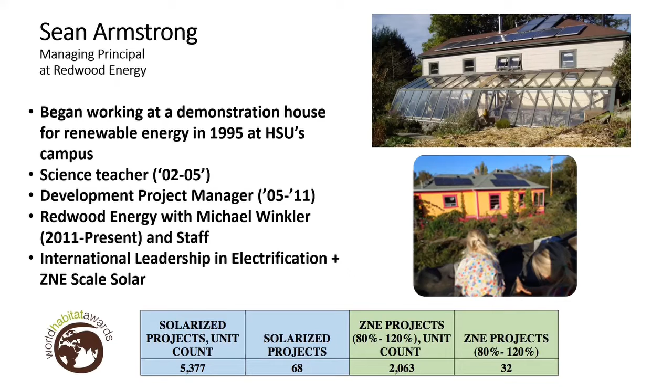Okay, so I want to give you guys a metaphor. The last time we really transitioned energy use was with horses. We went from 4 million to 24 million horses in 60 years in the United States. Our streets were literally filled with feces. You could not really cross streets in New York City without someone to shovel the way for you. It was like snow that never left. And it was 200,000 horses in New York City.

The founding of the ASPCA, the American Society for the Prevention of Cruelty to Animals, was a New York City effort to get people to stop beating their horses and to start putting them in at night in the wintertime. I'm thinking of how cold it got just last week in New York City. People didn't used to put the horses in. Horses live naturally for 30 years, and they die at an average of 3 years in New York City.

They would take 2 acres and 30 tons of hay a year. They would poop 30 to 40 pounds a day on the street and piss a gallon each horse. I used to have a horse-drawn carriage business. I did that for a summer, my freshman year in college. I just got this crazy job from this crazy guy. And I did it all summer long, Friday, Saturday, and then Sunday weddings.

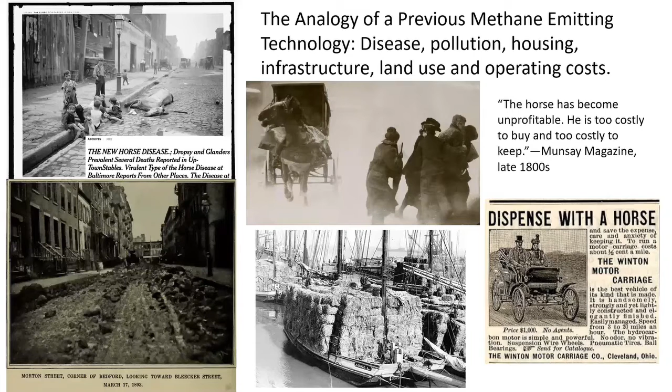One thing to note, though, is that cars are much more dangerous than horses in terms of the number of kids killed. There's a real transition in our road culture from kids being in streets to cars killing kids so frequently that streets are not a place for people now. Car companies really badly wanted that transition to allow them to go 40 miles an hour down a road that used to have 7 miles an hour horses. So, kid deaths.

Now, this trend of electrification is not policy-driven, it is cheap-driven. The leaders of electrification in our country are the least environmental part of it politically, the South. They are electrifying about 60% of their new construction. Nationally, a little under 1 in 4 homes built in the country right now are all electric. In California, it's like 10%. We are one of the least successful states in the whole United States at electrification because we have cheap fossil fuels. We're an oil-producing state. We frack, we drill, 90% of our buildings are gas.

And I encourage us all to look at that carefully, because fighting with people with money is like spitting into the wind. And it really would be much better to figure out how to lower the costs for people and just keep on moving without arguing over things.

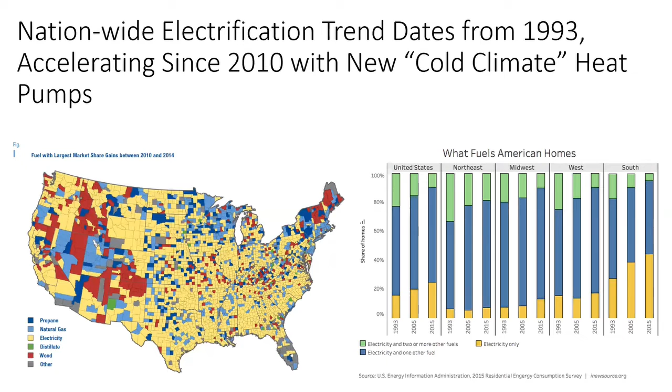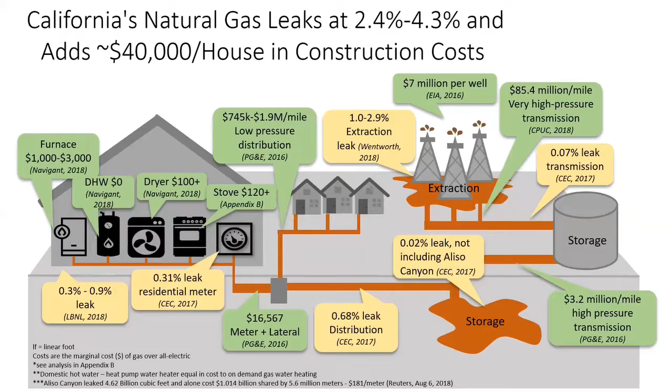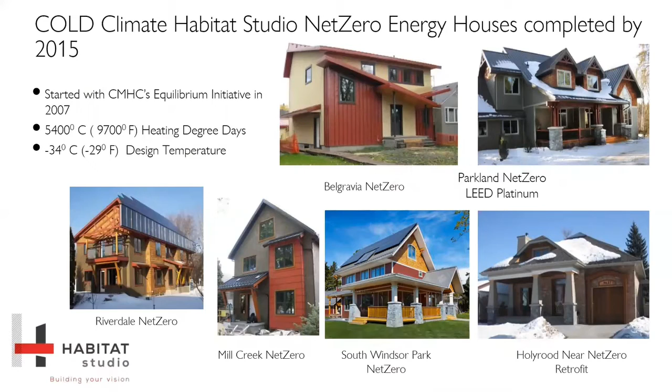Now where we're going though is production homes. Today, 1 in 5 new California homes have a solar array. It's not small. The average solar array on a new house is 8 kilowatts, which is massive. It's a big PV array. That's enough to power the house and maybe a car. So we are seeing, because it sells, 1 in 5 homes this year being solarized. These are production homes, it's all about selling it.

And next year, we're gonna have all homes. I don't know if you caught that, but the code that starts on January 1st, all homes in California have to put in a PV array. All apartments three stories and less, all of it. And it's about 60% offset, it's not 100%, because we still have gas in it, but we're pretty close there. So it'll be 85,000 residences next year built in California, all with a solar array, starting January 1st, to get a permit. So I want to show you, what does that look like?

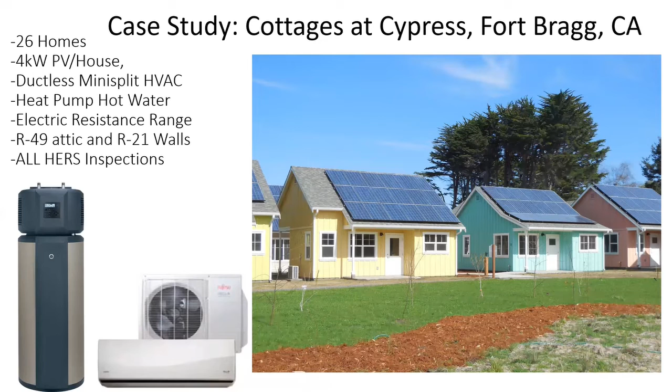These are larger homes, but they have the exact same 4 kilowatt system. So a little bit more efficient. These are built just like 2 years later, and already the systems have become more efficient. The houses were twice as big, and the systems were more efficient, so that there's 0 increase in the PV array. Awesome.

So this is now a ducted system. This is a larger compressor outside. This is an air conditioner compressor that works in reverse. Heat pumps are air conditioners that just work in reverse. So they work as an air conditioner like normal during the day or during the summer. And then they have a reversible pump instead of a single direction pump. They've got one more valve that controls the compression cycle the other direction, and you're done.

So you take an air conditioner, you spend $200 on it, and it becomes a heat pump. A very cheap way of getting a heater. Okay, so in consumption of energy, in these homes, plug loads are the #1 use. That's just something to note. At this point, it's not the water heater, it's not the space heater, it's just people's stuff, which I think is wonderful. That we've gotten to the point where it's not the space heating, it's not the water heater, it's just your toys, it's just your things.

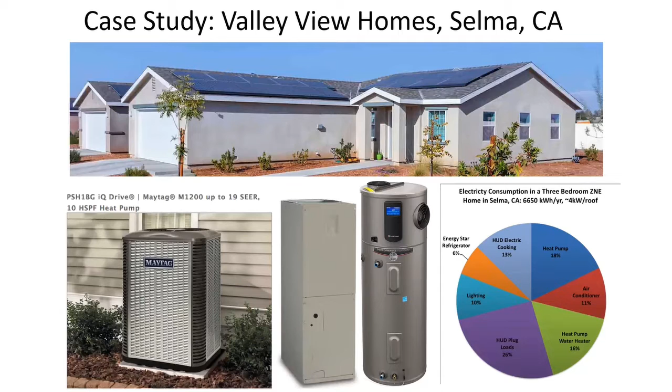So, tiny house. My friend Martin Robbins, we streaked at May Day at CCAT, that house. So he was a co-director of that house before I moved in. 3 students a year, 1 year you live in it. So it's like a zoo. You have hundreds of students every day coming by, looking at you, living in a house. So this is his little secondary dwelling unit.

It was a gas-electric mix, and he asked me, like, I only have 30 amps, which is a total of 7,200 watts. So that is about 4 hair dryers worth of power. And this is how he actually did it. 30 amps, that's what a clothes dryer plug is. So you could run an entire house on a clothes dryer plug. And it's not even that efficient because it uses an electric resistance water heater. But I'm just talking about how you do it for a moment here.

If you have very little power, you get a 120 volt, which is the stuff that's in the wall, normal. And you plug it in at only 8 gallons, because anything more than 8 gallons, you have to change the voltage to 240 volt because it needs more power. Now, 8-gallon tank, is that enough for a shower? Okay, the average shower is 8 minutes long. And you use water at 2/3 hot, with a 1.5 gallon per minute shower head. So it's a gallon a minute of hot water, and a shower's 8 minutes long.

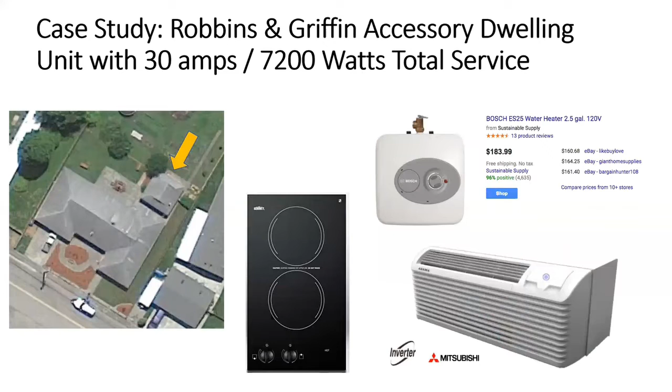So these are examples of that heating system. This is the cheapest thing you can do. Not the only or best, I'm saying cheapest, and the least power. This is called a packaged terminal air conditioner. Packaged because everything is done at the factory. There's nothing you do in the field other than just slide it into the wall and plug it in. So it's packaged. It's a terminal, meaning there's only one spot that the heating and cooling comes out of.

A packaged terminal, one spot, air conditioner, or heat pump. So they're called PTACs. Sometimes they're called PTHPs for heat pump. But everyone calls them pretty much PTACs. And this is a PTAC that you might have seen in someone's window. They're called window rattlers. And you might have seen something like this in a hotel. But these are nice ones, not noisy, crummy ones I'm showing you.

It's an important distinction, because most of them are like this, and they don't have internal computer controls to make the compressor quiet. But LG's come out with theirs, it's quiet. 40 decibels, library quiet. Arama, which uses Mitsubishi parts inside, similarly silent. And then my favorite, which isn't yet UL listed in the US, but it's being sold up in Canada. You guys saw the Canada presentation here a little ago, so I got turned on to this one.

Uses Mitsubishi guts, the very best guts out there. It's only 4 inches deep, so it hangs on the wall, not through it. You don't cut a hole in the wall. It's just two 6-inch ducts. So it's perfect for retrofits. And this thing uses as much power as 1/3 of a hairdryer, and it heats your whole house. I heat my whole house with as much heating and cooling as comes out of that.

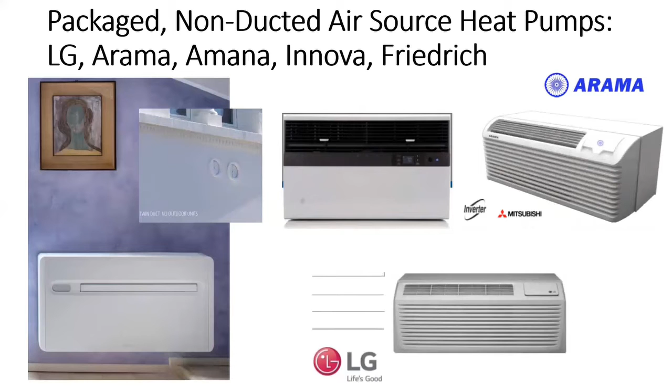Okay, this is the next step. This is a packaged ducted as opposed to ductless. So there's a duct. It's just like the one before, but you turn it on its side, and then you put a duct on it. And this thing goes through the wall, so that sits outside of your house, and you put this in a closet. And then usually you run a duct down the hallway. This is pretty apartment complex specific.

You can do it in a house, but they're small, so a ton to a ton and a half. Many homes have 2 tons, 3 tons, 4 tons, 5 tons. So this is for a small unit, and I'm doing small to big. So this is the next size up, and it supports ductwork. But it's cheap, because you don't have to do a compressor outside and a fan coil inside with the refrigerant line in between. It's packaged, so all that work is done in the factory, which cuts the price in half, because the field work is expensive. Questions? So the interest is heating or cooling the air. Yes, heating and cooling air.

Because it's sitting in the wall, it's blowing the excess heat or the excess cold outside. So the air conditioner blows the hot out. And in the wintertime, it's pulling heat from the outside air, so you'll feel cold air when you walk in front of it outside and warm air on the inside. It absorbs heat with these coils that sit outside, and then the liquid that's in the coils goes to the other side of the machine, and then it heats up the air that's being sucked in by a fan, and it blows up the duct and through the ductwork.

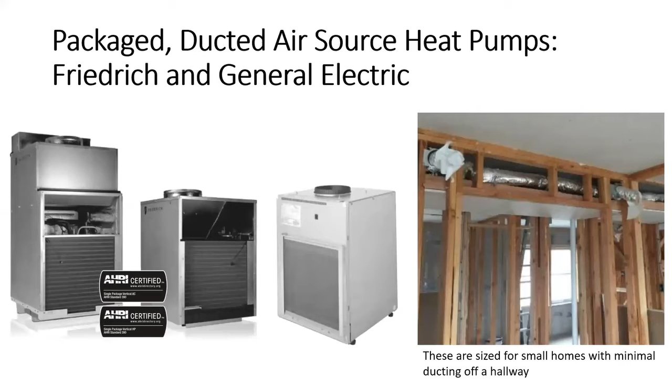That's how you do it if you're middle class in China. That is the housing heating and cooling strategy in China. You have a house, and it's going to have a compressor outside that's going to run some refrigerant inside to 2 different spots. It's the modern way that hundreds of millions of people are heating and cooling their homes. Heat pumps are big in China and Japan, and just generally in Asia. Anywhere where they didn't have cheap fossil fuels, they went electric. You in the back?

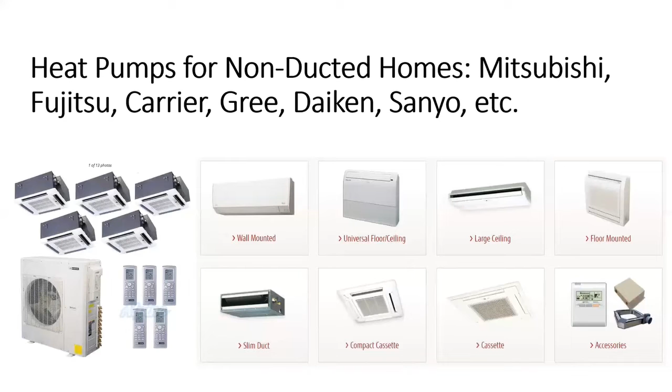So for radiant floors, this is the heat pump that can heat a water heater, and it can go heat your floor. So it does both. PHNIX, Chiltrix, Aermec are all brands that look like this. It's got a fan, got a compressor inside, and then it's going to run hot water and cold water. Super efficient. Radiant floors are lower temperature, and the lower the temperature, usually the more efficient it is, less work to be done. Radiant floors are the most expensive way to heat and cool a house. So if you put $3,000 into a PTAC, you're going to put $26,000 into a radiant floor.

And I love radiant floors like everybody. I do have a downside. They have a lag time. It can take a day to cool off the cement slab. So if you want your house to be one temperature and then you'd like it to be a little bit different, I like it cool when I'm gone. Like, you just can't change the temperature of your house very quickly. It might take a day. So things to think about.

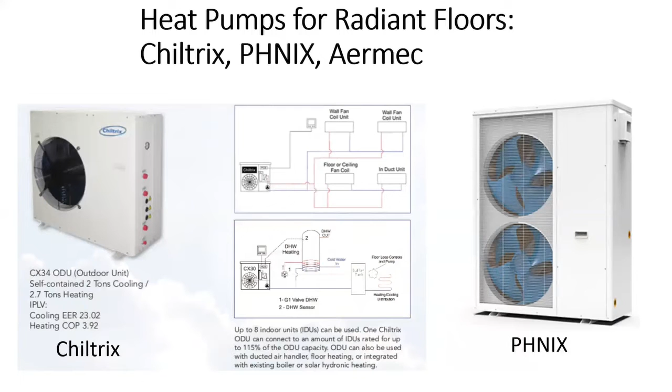I should probably reverse that because that is more expensive to do radiant floors. But ducting, which is a little bit less expensive than radiant, this is very common. So you're going to find lots of manufacturers making these. Everyone makes them. Carrier and Goodman and Rheem, Maytag, go down the list. These are all the same things. And then there's the ducting inside. And I just want you to see all the bends. This is why ducting takes a large, powerful fan, and it takes a larger compressor, because there's just so much friction and so much loss in every little crack and joint. They're leaky, and they take a lot of work to push air through. So they are nice because your whole house is conditioned, but there's downsides.

Oh yes, you could do a heat pump and radiators. Absolutely. It is a lot cheaper. And you can control the thermostat on the radiator, turn off the water to it so it doesn't radiate the heat. Yep. Way more controllable to put in radiators. That's sort of like European style. American style really has been like cement slabs. That's a big thing in this country.

Ductwork? You probably don't use your old ductwork, but you might. The reason why you might not is because these big ducts are for furnaces which burn at 3,400 degrees Fahrenheit for 15 minutes, or else they melt the engine. So they go and then they turn off. They're sized for that kind of heat, and then turn off. The heat pumps just operate at a lower temperature, slow and steady, and so you have smaller ducts for them. These bigger ducts will work, but you might lose a lot of heat along the way, and so you probably upsize the compressor significantly, more than you would need to otherwise with smaller ducts, because the ducts are specific to the system.

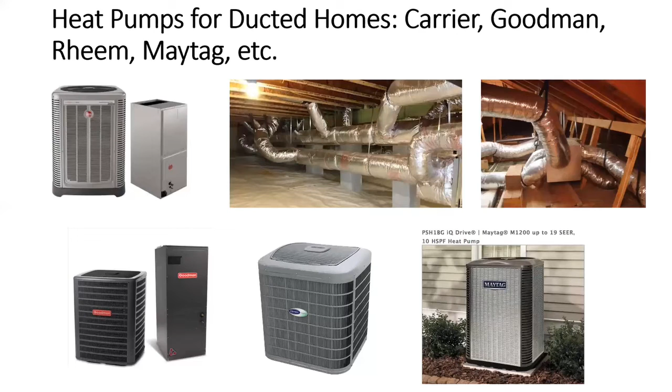So, differently put, these are solar heaters. The air is warmed by the sun. These take the heat out of the air. This is like a solar thermal water collector in essence, just crumpled into a ball with a fan on it. A solar water heater has a fluid called propylene glycol that circulates around. This has R134A or R410A. Both are refrigerants. They have the properties of absorbing heat and letting it go.

So they're the same. A solar flat plate collector is a flat thing with tubes in it. And here, the tubes are there. They're just smaller, and there's a fan blowing over it. Instead of being unfurled in front of the sun, it's made smaller with a fan blowing over. And the refrigerant is important.

When you go from liquid to gas, a phase change, it takes huge amounts of energy to boil. That spot in between liquid and gas takes tons of energy, and you can store energy, essentially. You can keep shoving energy into it while it's still liquid, then move it around, make it a gas and make it release its heat. Going from liquid to gas is not something solar thermal collectors do. That is a way of storing energy and delivering it. It's a chemical property, around that moment between liquid and gas.

So this is a solar thermal collector. It is an extremely efficient version of that, with a fan, better refrigerant, and a way of using the refrigerant where you go liquid to gas instead of just keeping it liquid. But the heat source is the air, which is heated by the sun. It's just a crumpled up solar thermal collector, way more efficient. So you should put it in. If you're worried about the extra $100, think about what it's going to cost to chop down your trees. So you should just go for it.

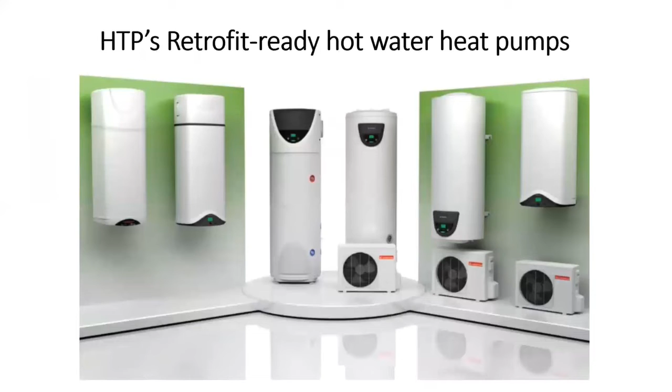So what's not here yet, but will be here within the next year, is the 20-gallon, 30-gallon, and 40-gallon wall hungs. That's the compressor on top. Ariston is an Italian company, and Europe is really big in heat pumps. You didn't know, they're everywhere when you go around. All sorts of old castles have a heat pump on the wall now.

And so this, like the 50-gallon product, everyone makes that. And this is the 50-gallon product with the compressor that sits outside and delivers hot water to it. So that compressor then can be paired with smaller wall tanks, or you can stick that one, which has the compressor on it, on the wall.

So Ariston makes this. They just bought 51% of HTP, which is an American manufacturer of water heaters, the big one. So HTP is now showing up at all these conferences saying, hey, we've got this really awesome product over in Europe. We need to get it UL listed here. What do you guys think would be the one that we should get UL listed? Because it costs 50 grand and it takes half a year to get UL listed for every single one that we do. So they're trying to be strategic.

And the 40-gallon product is what everyone in the community is like, obviously the 40-gallon, everyone has 40 gallons, so get a 40-gallon. So that's where we're almost at. We have 50-gallon products, and they're going to bring out a 40-gallon, knowing full well it meets the smaller federal standard. And people need to understand that means you get 2 showers in a row, not 3. 2.5 showers. Yes, ma'am, in the back.

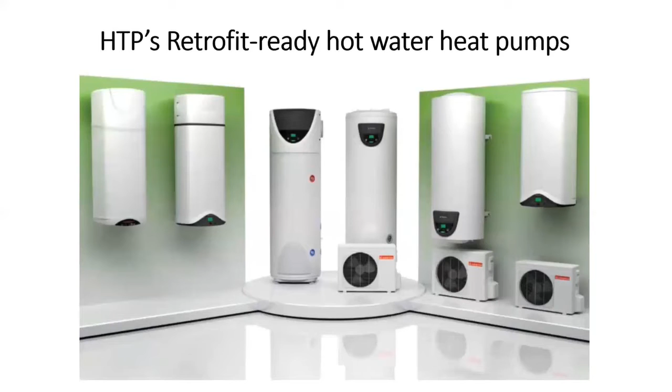Well, I don't represent anyone. Oh yeah, there are energy consultants in our industry. So Title 24 energy consultants. You have to follow the code, which is called Title 24, the law, and you have to do that software run every time you pull a new building permit. And if you guys actually got permits for your retrofits, 90% of Californians don't, so not holding anything. If you got a building permit for this stuff, then you would have to also do an energy model. And those people, the Title 24 energy consultants, are in our state the industry group that makes recommendations about representing products.

Yes. So when all the green building certification stuff started out, the on-demand water heating was the way to go. You didn't say anything about on-demand earlier. Well, an on-demand, if it was electric resistance, takes 60 amps. And 60 amps is like, my house had 100 amps. So to put in an electric resistance on-demand is a massive, massive amount of energy.

My first all-electric development, I wanted to put in electric water heaters. Heat pumps didn't exist. It was 2008. So they didn't exist, they weren't here in the States. So I chose an on-demand electric resistance. The electrical engineer came back and said, that takes your 200 amp panel for the building and turns it into a 600 amp panel for the building. That's going to then go upstream to the transformer. So you're triggering $100,000 right now by putting electric resistance water heaters into this 35-unit apartment complex.

Oh, I see. So the efficiency of power demand makes a big difference to all the power infrastructure. And these are very low power. So I'm into this one because it fits where the on-demand gas system would be, but it uses a compressor, so low power, using the amount of power that's available in the wall, not requiring literally a larger electric cable and panel capacity and transformer capacity. Yes, sir. So we're expecting a 40-gallon one next year, you said? Yes, 2019 is the year of the 40 gallons.

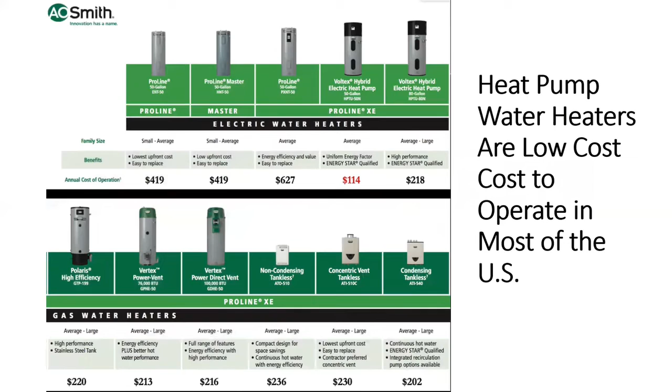Yes. So you would not put a water heater of any type outside of a house in cold climates. I'm from Wisconsin. Your water heater has to live in a basement. It might need an electric resistance element next to it, so the pipes don't freeze on super duper cold nights. So water is the thing you have to be aware of. You can't freeze the water. The heat pump is fine. It can go down to negative whatever, but the water can't. Totally fine for Berkeley. Yeah, we never have frozen pipes in Berkeley.

Yeah, these ones are 240 volts. So what's happened is that I work in retrofits and apartment complexes. So all 70 of these things I gotta get done at a time. I'm so frustrated because I can never find a 40-gallon replacement. So a year ago, I started a program, which now all the utilities have thrown in on. We had a conference, we had weekly meetings around the Retrofit Ready 40-gallon tank.

That is 120 volts, so it plugs into the wall. It's a 500-watt product, so it doesn't need to be wired for anything. You can plug it into any room with no rewiring because it uses about 1/3 of a hairdryer. There's no laws around where you plug in a hairdryer. So that product is technically totally possible; they don't have to change their products except from 240 volt to 120 volt. They have to say, what are we going to do about this 51-gallon thing? They're like, well, why don't you meet the 37-gallon standard then? And people just decide if they want it or not. Okay, so that's how these things are shifting.

You know, Rheem and A.O. Smith, they are gas water heater companies primarily, and they've been really moaning about how not successful these have been going. So they've been reluctant to invest in them. Japanese and Chinese companies have not been reluctant. They understand what the market is and they're running for it. So not to dog them, because they're very active participants, Rheem and A.O. Smith and HTP and Bradford White. But I'm seeing Sanden, the Japanese company, immediately jump on it. I'm seeing HTP, Ariston, the Italian company, run for it. They have a different sense of the market.

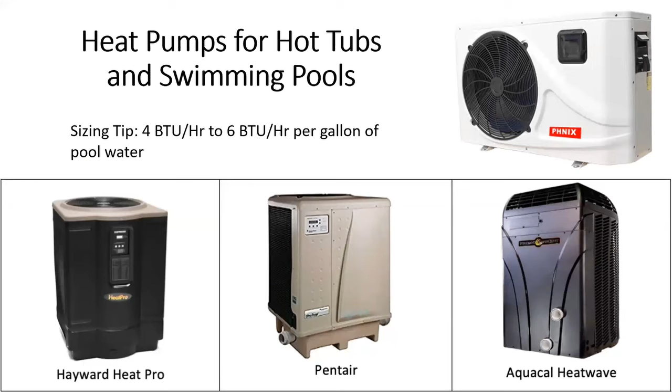So who here is a fan of the Great British Bake Off? Yeah, isn't it great? I love it. They're always working on induction ranges. They don't really feature that much, but those are made by Schott, a high quality German manufacturer of induction. All the chefs of our planet now are being taught in kitchens like this because, in part, it's so expensive putting gas into a teaching kitchen.

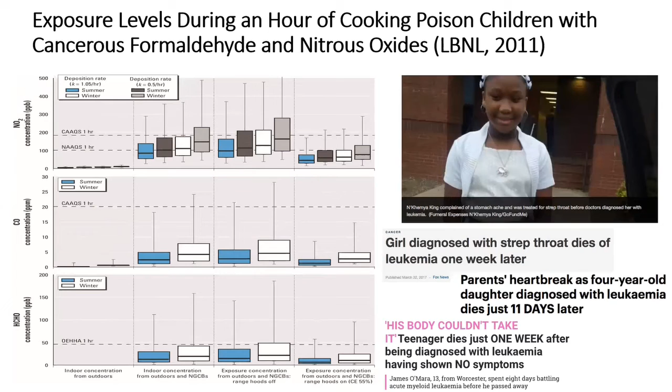So, there's a lot of reasons why electric stoves are awesome. They're faster. They're more controllable. Chefs love them. Julia Child, she only ever cooked on electric resistance, entire career. Yeah, I love that woman. 6'1", like after my own heart. Thomas Keller, that's the French Laundry, did a remodel, all electric, gorgeous new kitchen. You can see lots of videos of it. Cafe Ficelle, our best bakery in California, all electric bakery down in Ventura.

This guy, he's on the team of the Fête du Pain, the bread party. You go to France for 3 weeks and you are part of an international competition to make some bread. And you know, all electric kitchen, Wolfgang Puck, Anthony Bourdain, rest in peace. These people are all leading voices on how do you do it right. And they're all trying to say, like, induction is better for all the reasons why chefs want it. Two that you might not be familiar with.

Induction cooks at like 80 to 90% efficiency. Gas is at like 25 to 40. So you put at least twice as much heat into a kitchen if you're cooking with gas. And kitchens are miserable places if you're actually producing food for a restaurant or a cafeteria. They're so damn hot and humid. So when you go all electric, as they did, that's one of the things that he points out. It made the kitchen so much easier to work in. It's almost 2/3 less heat. It's much less air conditioning, so much less venting, as the gas combustion products are not just water vapor, but a ton of carcinogenic byproducts.

So I encourage you guys to all get your first one, spend 50 bucks, spend $100 tops, get just a single burner and play with it. I gave these away for Christmas, 50 bucks. Then this is your play device, like 2 burners. I have 2 of these in my house, 2 different cooking stations, and they use as much energy as like the blender. So I don't have to retrofit my kitchen. I can just plug them into my wall sockets, and I've got 2 cook stations, so my wife and I can cook at the same time, or my kids can cook when I cook.

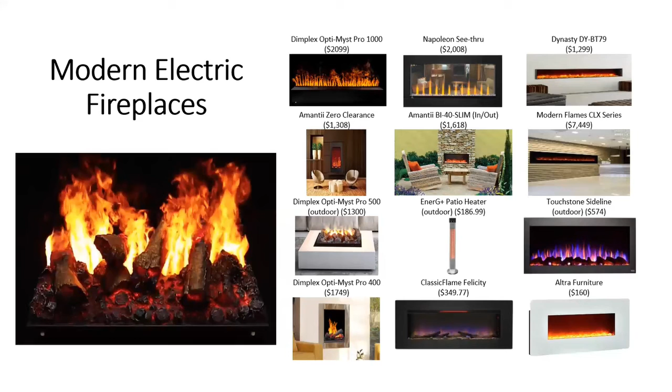Okay, so I want you to see this. This is most important for me. People blame each other for who is wasteful with their energy. That happens all the time. Low-income people get shit non-stop. I work with low-income people, and they're more frugal than anyone else. And I've charted this out. The richer people in the apartment complex use more energy than the poor people in the apartment complex. Really easy to see that income equals energy consumption. You're all way more energy consuming than most low-income households.

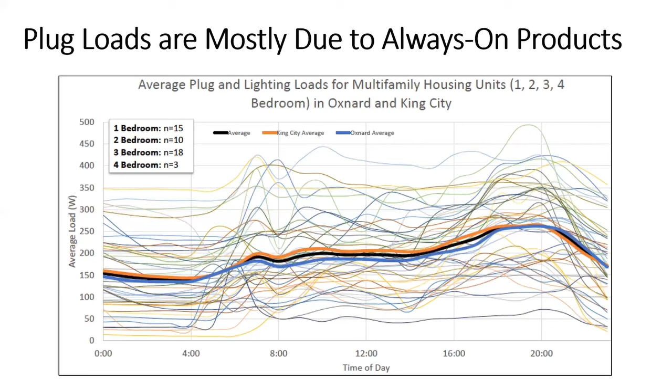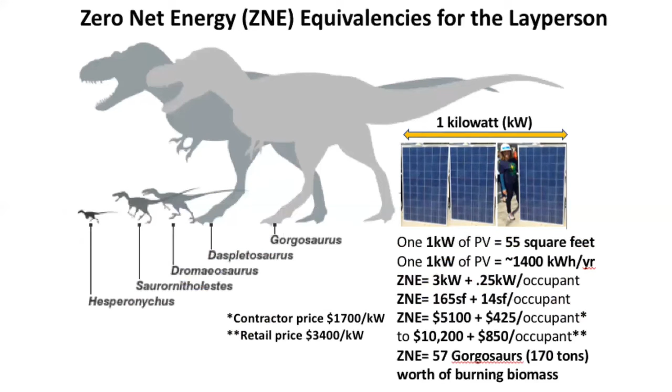This is what it costs the contractor, and this is what it costs you, about twice as much. So I wanted to give you guys some numbers to get a sense of it. And last but not least, more adventurous PV. This is on over someone's swimming pool.

Now keep in mind, solar has dropped in price about 80% in the last 6 years. And so putting it on its side, while it costs more to get the job done, it's still cheap compared to even the zero energy housing I was doing when I started it, and it was profitable and things were cool. So this is why you're seeing buildings all over the world now, fancy stuff. I'm not saying it's cheap, but there's a lot of people willing to pay now for windows and skylights and fancy awnings and all the rest of it.

Shingles, that's, you know, Tesla shingles. And I wanted to push the envelope. Zero energy is awesome. And now there's a 10-story tall window outside the city of Dubai that you go out to as a tourist amenity. And the whole thing is making electricity. The glass that you're staring through to frame the city is a PV window, 10 stories tall. So the ability of us to use glass and pick up electricity from it is radically expanding and improving.

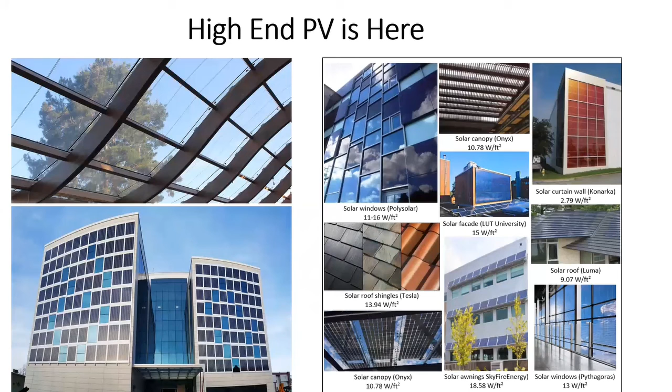And there, now we're going to do our questions. So go ahead, I'll do the clapping thing. There you go. And those who want to leave, you should do that now. And then those who want to stick around for the Q&A, then do that. It'll make it easier. So you had a question?

Yes, you were talking about California and the electrification right now here. Yes, we're the worst state for electrification in the union. Yeah, and so you said something about a neighborhood, and then something needs to be developed there. What was that? So the idea of how do you get rid of gas? You can do your own house, but gas is still in the street. So the way that it has to happen is we have to shut off neighborhoods. Every individual is worth doing.

But the real move is to shut off the neighborhood, so you get rid of all the leaks in the street all at once. And so that kind of coordinated effort requires planning and activism, but that's how it will really happen. You go to the tippiest branches and you just try to cut off the twigs and you keep on moving your way back of the tree of gas, and that's ideal. But really, anyone who shuts off their gas is a radical activist.

And SoCal Gas was paid last year $1 million to talk about shutting off their gas. PG&E, a year and a half ago, started having secret conversations about getting rid of their gas asset. Not coincidentally, when they went bankrupt, they immediately said, anyone want to buy our gas asset? Because that'll really help us pay it off. No one wants to buy their gas asset. There's going to be no gas sold in the state in about 15 years. For real.